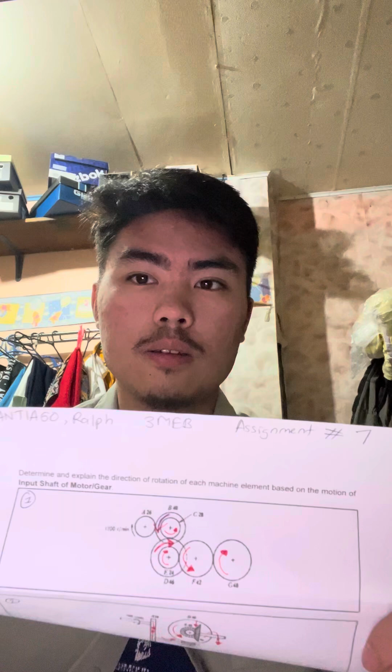For figure 1, the system starts with gear A rotating clockwise at 1200 RPM. Gear A drives gear B, which rotates counterclockwise. Gear B is part of a compound gear set with gear C, meaning gear C also rotates counterclockwise.

For gear D and gear E, gear C drives gear D, making it rotate clockwise. Gear D is compounded with gear E, so gear E also rotates clockwise.

For gear F and gear G, gear E drives gear F, which rotates counterclockwise, and gear F drives gear G, making it rotate clockwise.

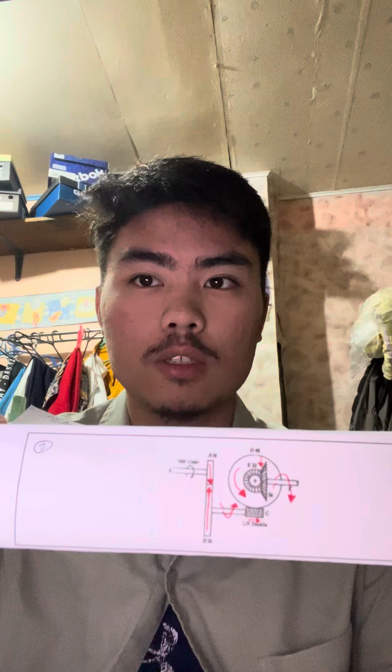For the second figure, gear A rotates downward with 900 revolutions per minute, driving gear B, which rotates upward. The worm gear C is connected to the shaft of gear B.

It has a left-hand double thread. The left-hand thread means it has to rotate counterclockwise to drive the worm wheel forward. Double thread means that per revolution of the worm gear, it moves the worm wheel D by 2 teeth.

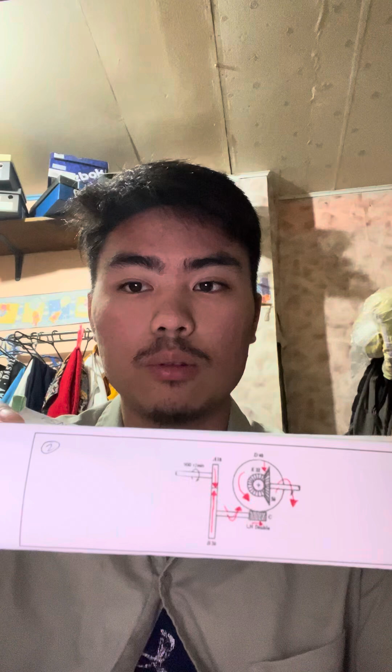For gear D, the worm wheel, and gear E, the bevel gear, gear D and gear E are spinning counterclockwise since the worm gear is spinning upward.

For the third figure, the input pulley E is driven by an electric motor and is attached to a larger pulley by a belt.

For the 48-inch pulley and the 12T gear, the compound set, the belt moves to the right together with the large pulley and rotates to the right with the smaller gear. The small 12T gear drives the 144T gear.

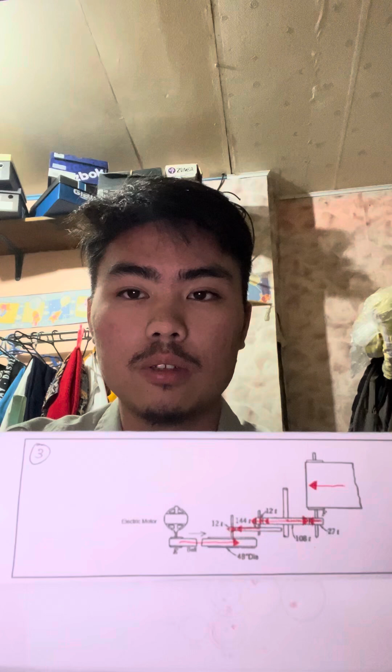For the 144T gear and the second 12T gear, the compound set, the 144T gear spins to the left together with the 12T gear.

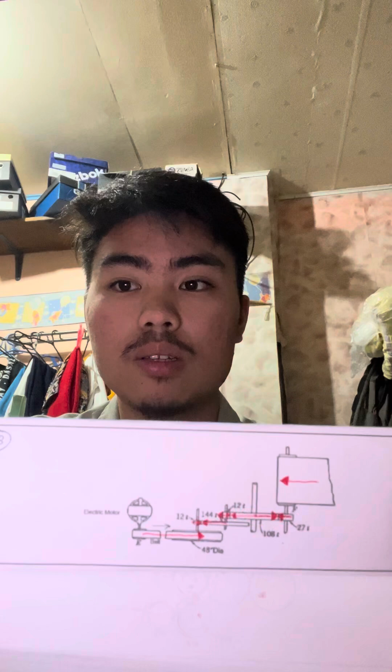For the 108T gear, it spins to the right and drives the 27T gear. For the 27T gear and pulley F, the compound set, the 27T gear and the pulley F spin to the left.

And for the last figure, for step pulley A, the belt moves downward together with pulley A. Step pulley B is also moving downward and drives gear C.

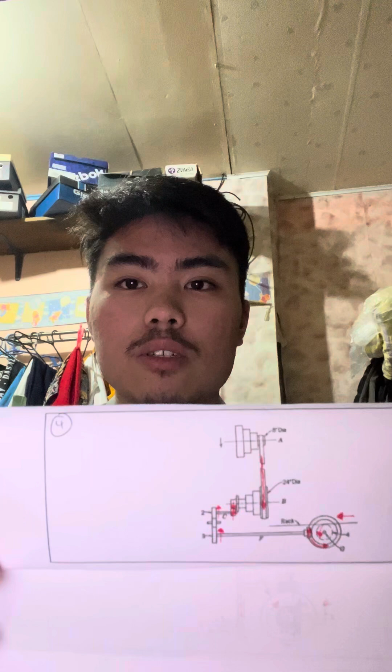For gear C and gear 2, it spins upward. For gear train 2 to 3, gear 3 spins upward and drives a smaller gear which spins downward, and finally gear 3 which spins upward.

For gear 3 and gear F, the bevel gear, a long shaft connects gear 3 to a bevel gear F, which also spins upward. For gear G, the bevel gear, the ring gear spins counterclockwise.

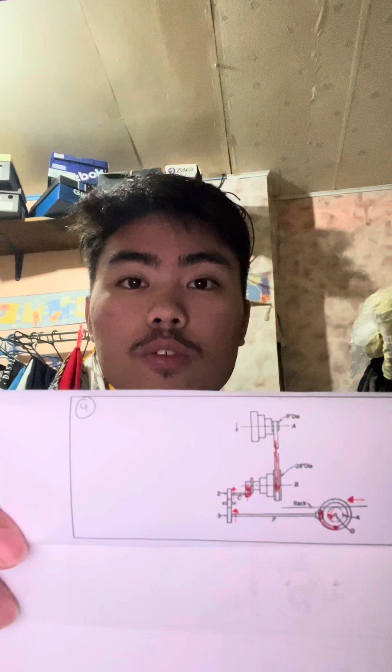For gear 4 and the rack, gear 4 and ring gear G form a compound set, which means it moves counterclockwise as the rack slides to the left.